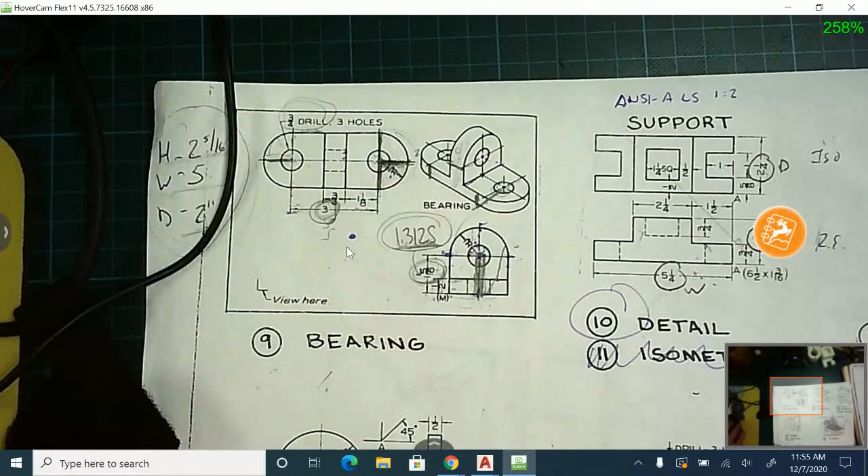Okay, we're going to look at the bearing drawing, which is number 9 in the packet.

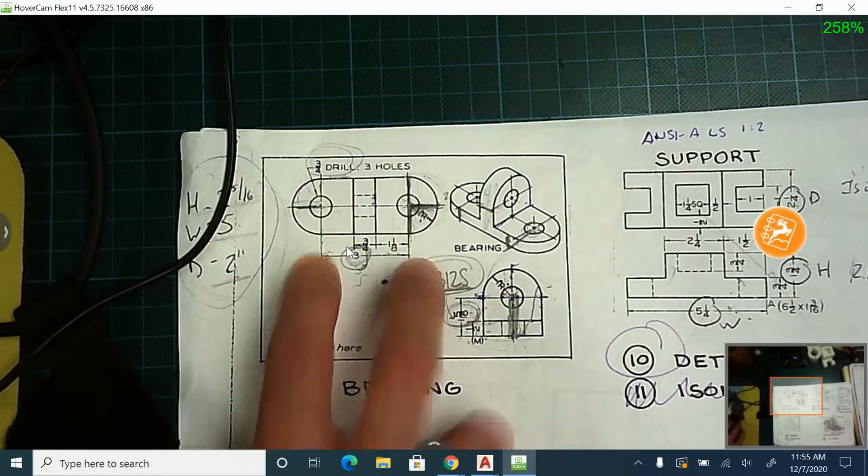First, you have to figure out your height, width, and depth. This one's a little trickier because it doesn't give you the overall height, width, or depth directly. You have to do some math to figure it out. For instance, our width only tells us that it's 3 inches here. We know the height is 1 5/16 from the bottom to the middle. Our front view is missing, so we have to do a little math to figure that out.

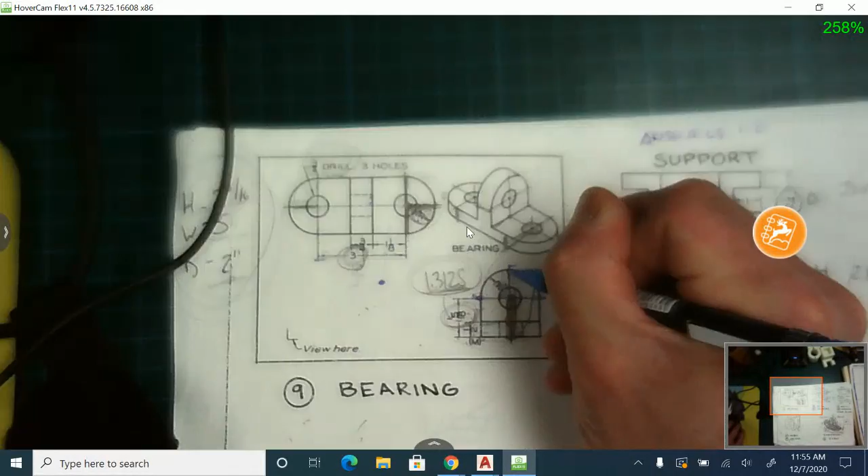What's very important is this radius dimension. This is 1 inch, and this radius dimension is also 1 inch. That means the distance from the center of this circle to the top is 1 inch. From the center here to the side is 1 inch. From the center here out this way is 1 inch. From the center here down is 1 inch, from the center here up is 1 inch, and from the center out is 1 inch. So again, that's a 1 inch radius.

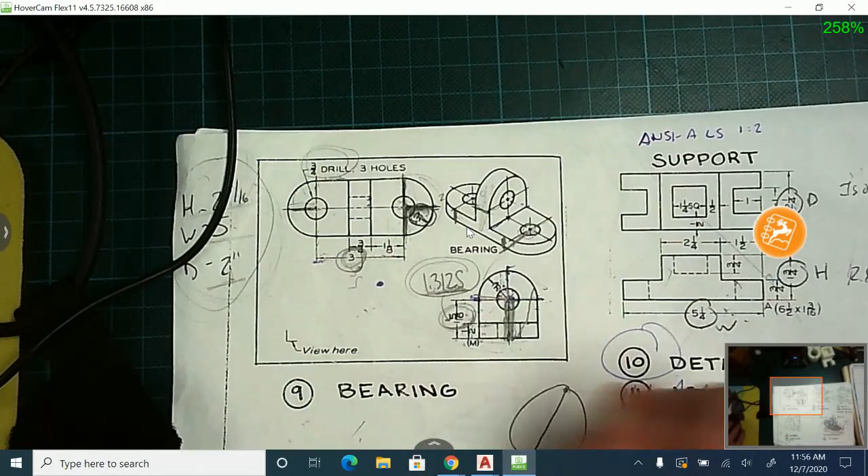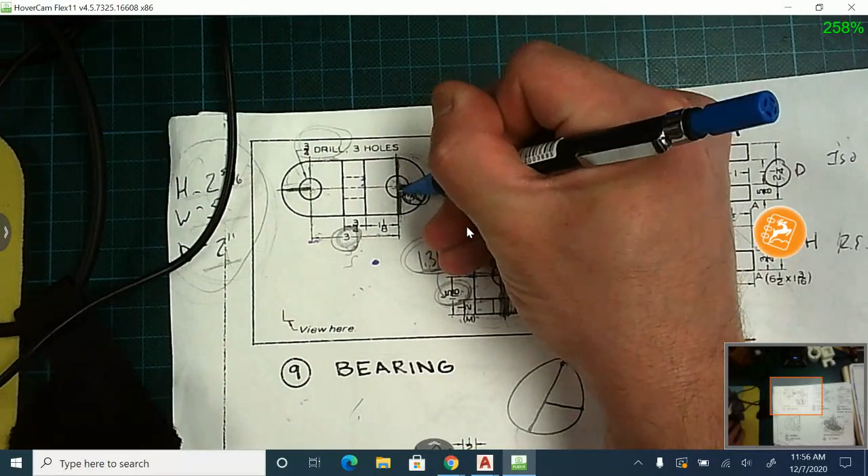Remember, a diameter is all the way across, and a radius is half. Knowing this is a 1 inch radius, and that it's 3 inches from here to here, I just add 1 inch on each side. So I have 1 inch there, 1 inch there, giving me 5. My height, I'm going to add 1 inch to 1 5/16. And my depth is going to be 1 inch up, then another 1 inch, so my depth is this distance, which is 2. So you have to figure out your height, width, and depth dimensions, do a little math, and add in the 1 inch radius.

Once you figure that out, the setup is really no different than our other 3-view drawings. Right now I started with my L shape. I'm going to use my offset tool, starting with the width, which is 5. I'm going to go 5 to the right, then offset and go up.

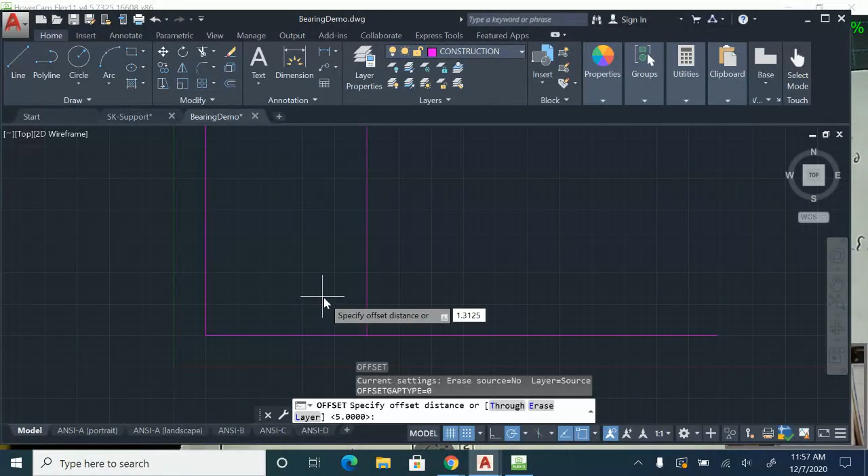1.3125, but actually I need to add the 1 inch radius. If you look at the measurement here, 1 5/16 is 1.3125, then you add the 1 inch radius, so it's going to be 2.3125.

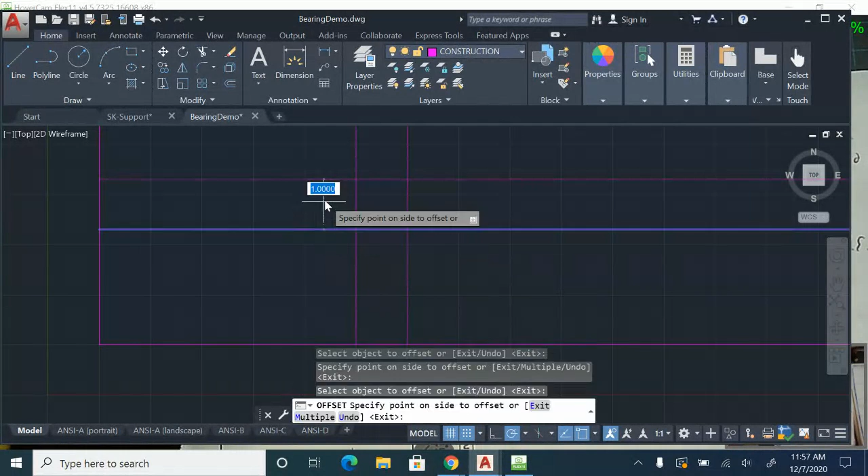Then I'll go up. I'm still going to set up my 1 inch spacing -- 1 inch to the right, 1 inch up. Where those 1 inch lines intersect at that upper right corner of the square, that's where I'm drawing my 45-degree projection line.

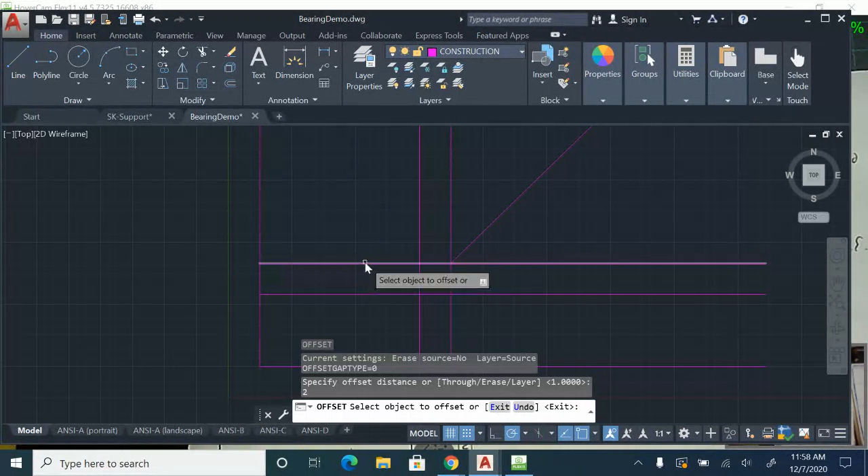And the last measurement I need is depth, which is front to back, and that's going to be 2. Offset 2. Now we have the 3 boxes set up for height, width, and depth.

Double check that they're correct. This should be good -- 5 inches. That should be 2 inches, or 2.3125 is correct. This one should be 2 inches from here to here. So I think we're good to go.

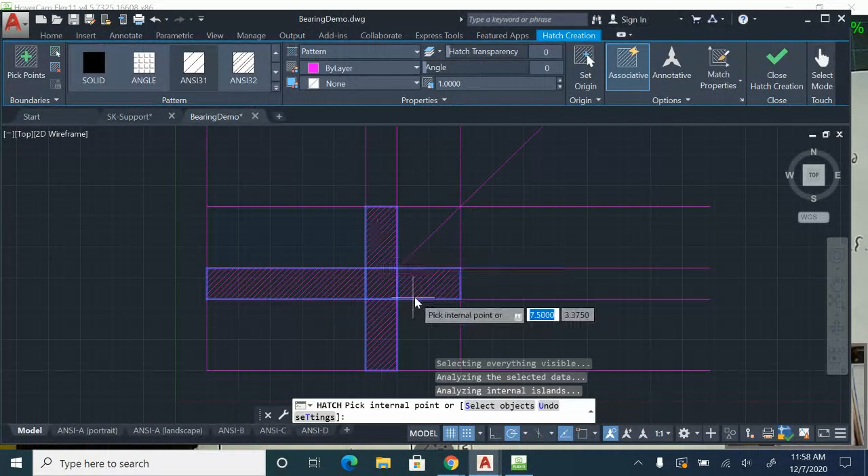I'm going to hatch in my 1 inch space just to help me visualize the spacing for a bit. So 5 by 2 5/16. This is going to be 2 by 2 5/16, and this is going to be 5 by 2. So again, height, width, and depth -- very important.

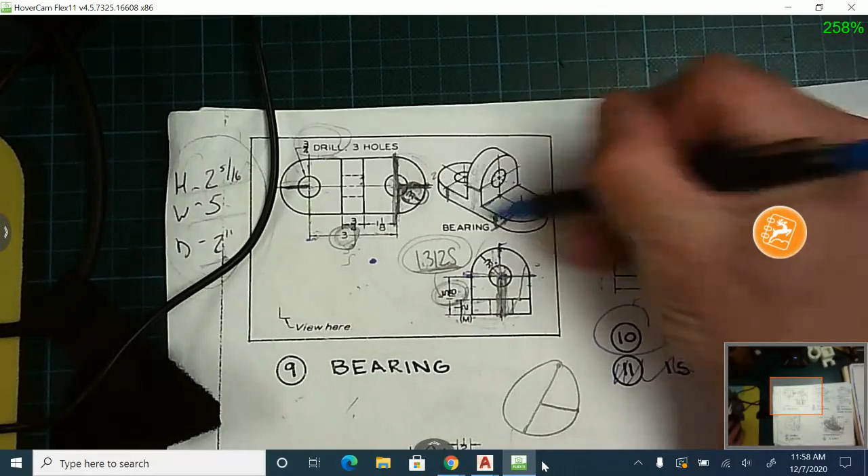Now I can start doing the insides. Maybe I'll start with this 1/2 inch base. You'll notice it's kind of like a T shape, an upside down T shape, and the thickness of this base is 1/2 inch. So what I'm going to do is offset up a 1/2 inch from the bottom.

Now I have the bottom part of it, so I can switch to visible layer really quick. I'm going to use my rectangle tool to draw a rectangle right there, and also I'll need a rectangle right here as well. So that's going to be my 1/2 inch base.

I also know that from the bottom here up is 1 5/16, so that's 1.3125. Now I have the center point of these circles, so I can draw in my 1 inch radius. Also the small circle in the middle has a diameter of 0.75.

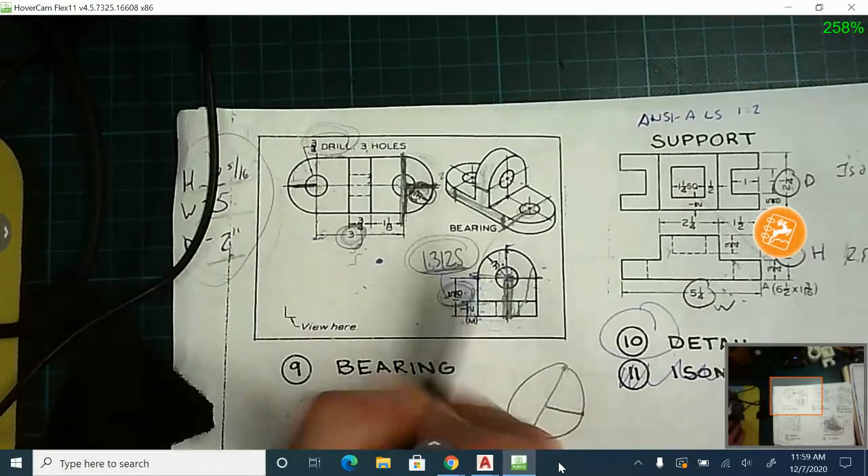And I found that out by looking right here -- it says 3/4 drill 3 holes, meaning these 3 holes are 3/4 of an inch, or 0.75 diameter, drilled. And I did the 1 inch radius. I'll have to trim off the bottom half of this circle though. So TR, enter -- I'm going to keep the 2 purple construction lines on each side. Hit enter, and I can get rid of the bottom half of that circle.

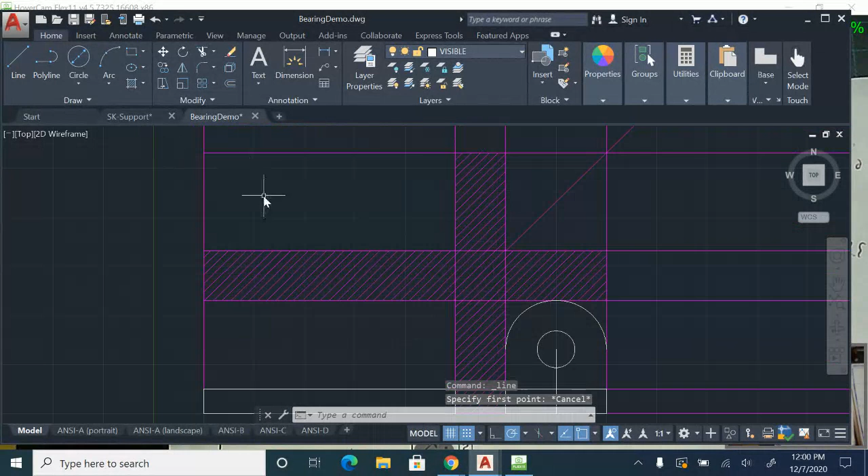Maybe for the top view, I can go up. There's a couple different ways I could do the top view -- I could draw a line, or I could draw the same rectangle. I'm not quite sure, I'll have to trim some of that. And then I can go this way, over 1 inch.

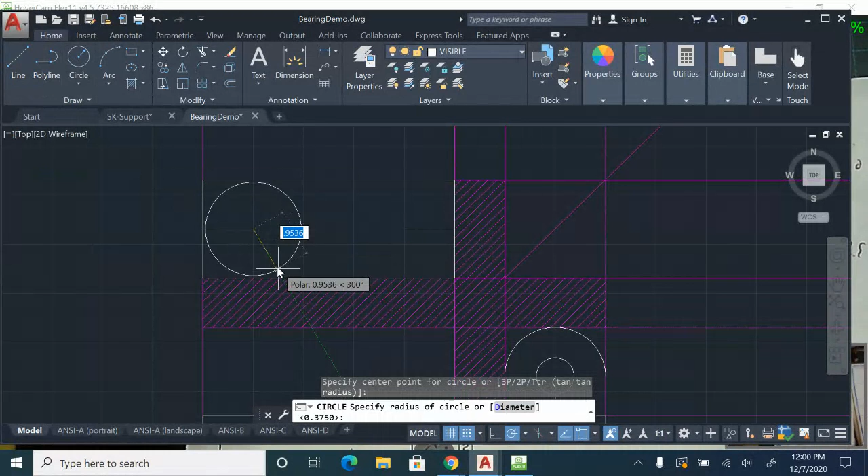Same thing on this side. I could go over 1 inch. That's going to get me the center point for the top view now. So I have my radius, 1 inch radius, and then I have my diameter of 0.75.

I can redo that on the other side, or I can use my copy tool. I can select both circles, click my copy tool or CO enter. My base point's going to be the center point here, and I'm going to copy it to the end of this line right here, which I drew over 1 inch from the side.

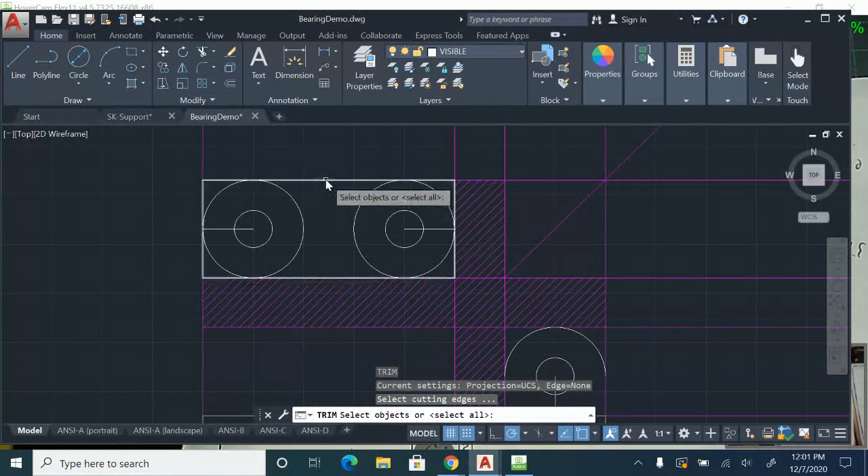And same thing, I can do a trim now, keep this, enter, get rid of these two sides. Now I'll also have to do another trim, and I'll have to keep the circles that I drew and get rid of these corners.

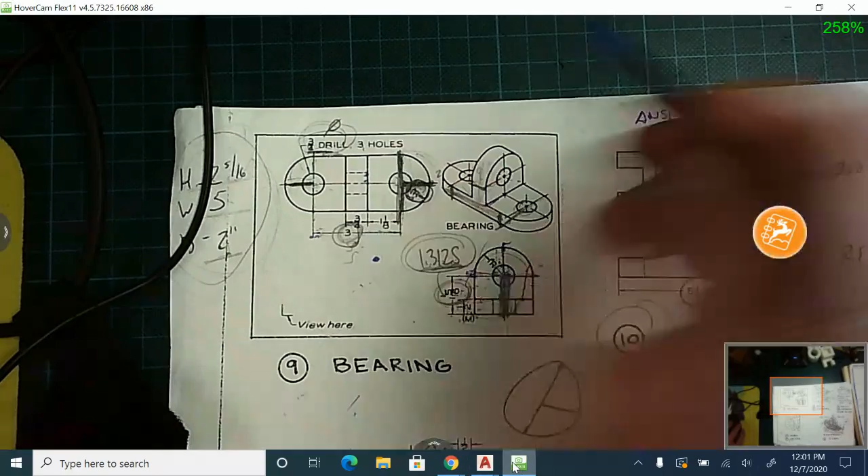Because remember, I used that rectangle tool to draw the big rectangle. Another thing I'll need to get in is in the middle here, there's a 3/4 inch space. That's the part that sticks up. So I have this 3/4 inch part that sticks up.

So what I could do with that is find my midpoint. I go right in the middle, so I know that's at the middle. If this is 3/4 thick, half of 3/4 is 3/8. So what I could do is offset 3/8. If I offset 3/8, I can click this line now and go to the right and go to the left. So now I have 3/4 of space.

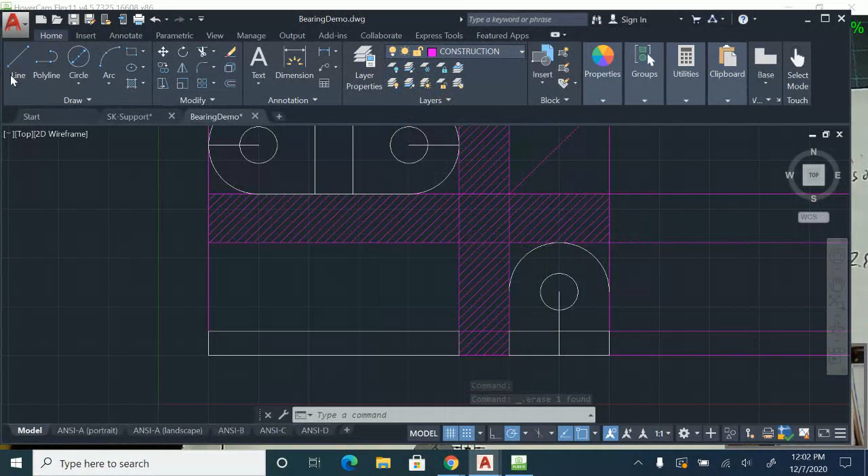Now to do the front view, watch this. I'm going to take a construction line. I'm actually going to bring that down because it's going to be like an upside down T shape. That's where that part will come in.

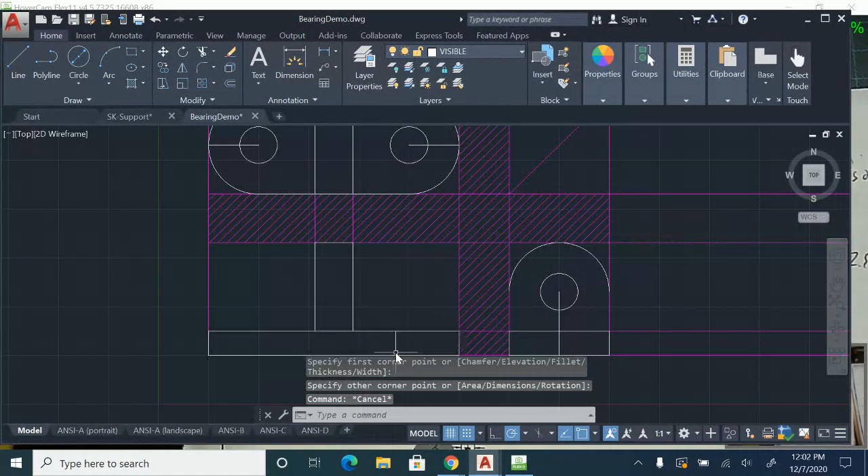And I can, again, use my visible line and just trace over this. Or a rectangle, or trace over the lines. I'll have to trim out this part here because it's all connected. It's all one surface. If you look at it closely, it's all one open T space there.

And then finally, I'll have to do some hidden lines. I can clean this up a little bit too. I'll have to delete these. For the hidden lines, I'm going to switch to hidden layer.

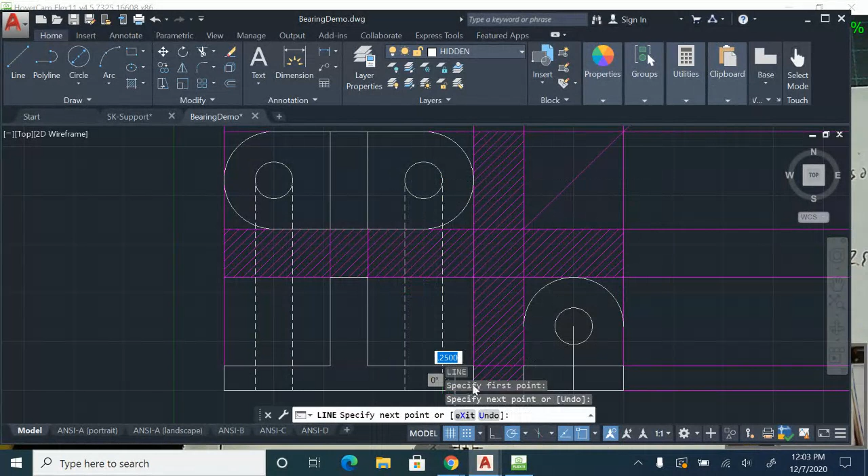I need to bring down the left edge of this hole and the right edge of the hole. Same thing here. I need to bring the left edge of the hole and the right edge of the hole. If I don't bring these hidden lines down, I would have no idea looking at this part that there's holes in there.

And when I trim it, I'm going to keep the top, enter, get rid of this, and then get rid of that. Same thing, I need to bring hidden lines over from this right side view, over, and from this right side view again over for the top and bottom of this hole. And I'll trim, keep this, and get rid of that.

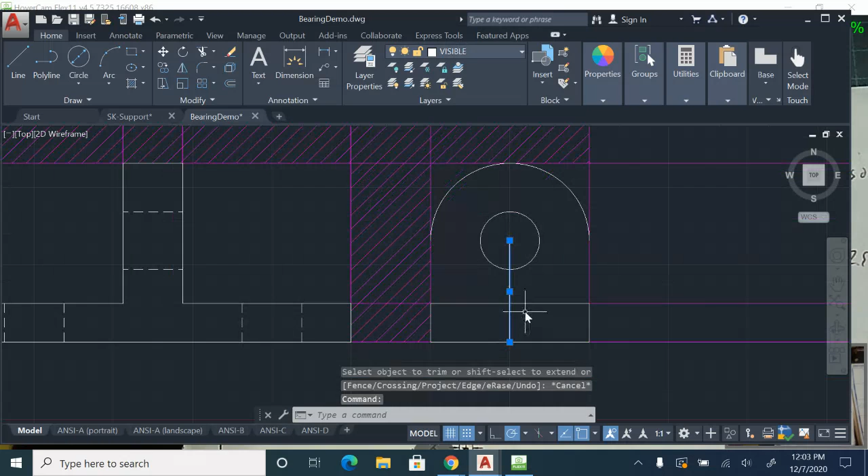The last thing would be I can get rid of this line. There's going to be hidden lines right here in this base, right? I have the two hidden lines on the bottom here. So I actually need to project this one over and down.

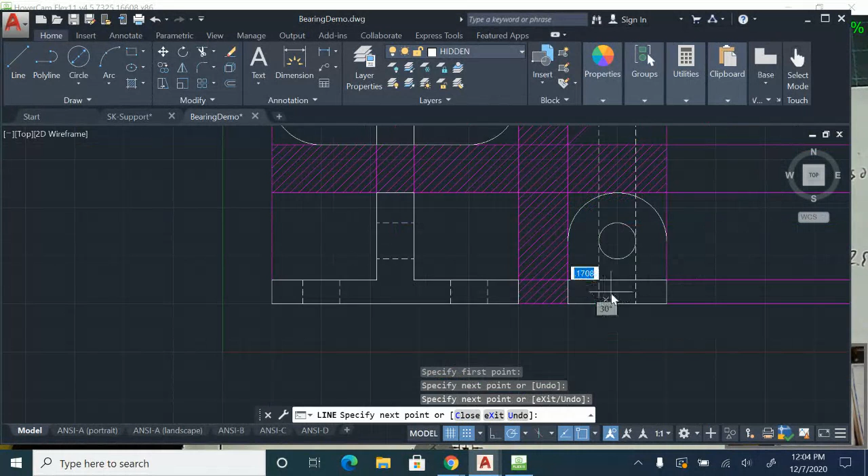Over to where it hits the 45, and then I go down. And those will be my hidden lines in the right side view. Get rid of this, and actually now I can just delete these two lines.

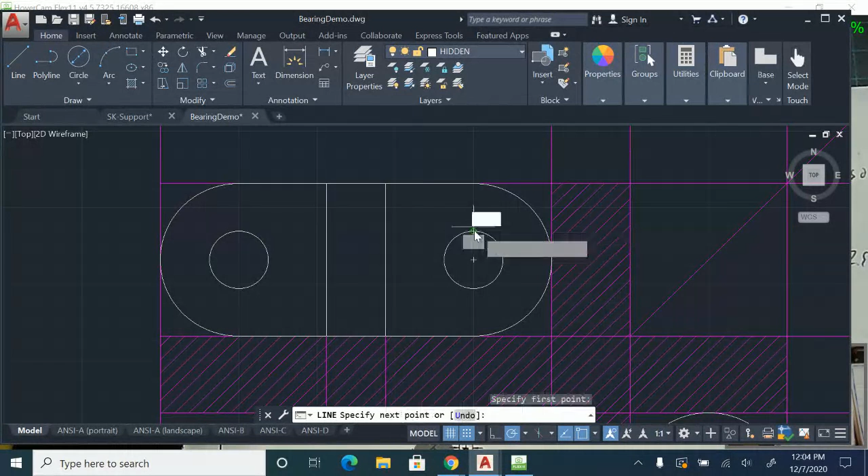And then finally, there'll be a hidden line in the upright. So the upright has a hidden line, that 1/2 inch hole. So I need to put hidden lines right in here. And I could actually just bring this circle over, the top of it, and the bottom of it. Even though that's technically not the right circle, it's this one that should go up and over. They're all a 1/2 inch, so it would work out that way. And I can get rid of this.

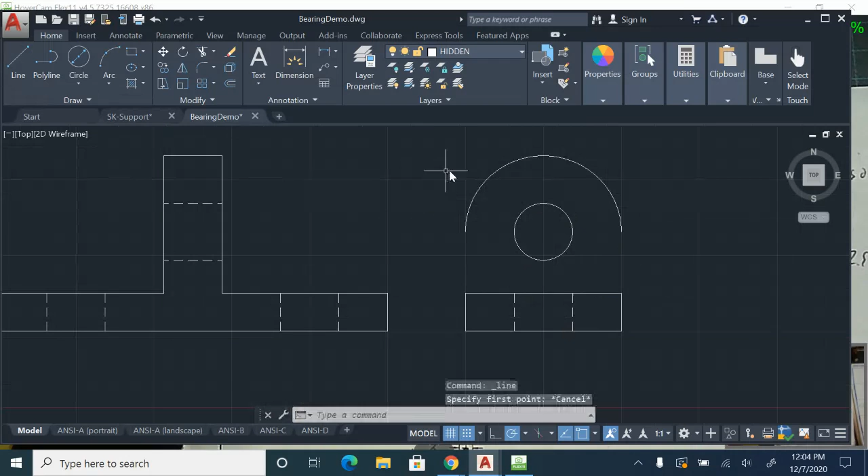If I turn off my construction lines, I can kind of see what I got. It looks like I need to just connect a line in the right side view, from here going down, and here going down. So that completes the part.

At this point, I would want to go into my center layer, annotate tab, and put my center marks on. 2 there, and then 1 there.

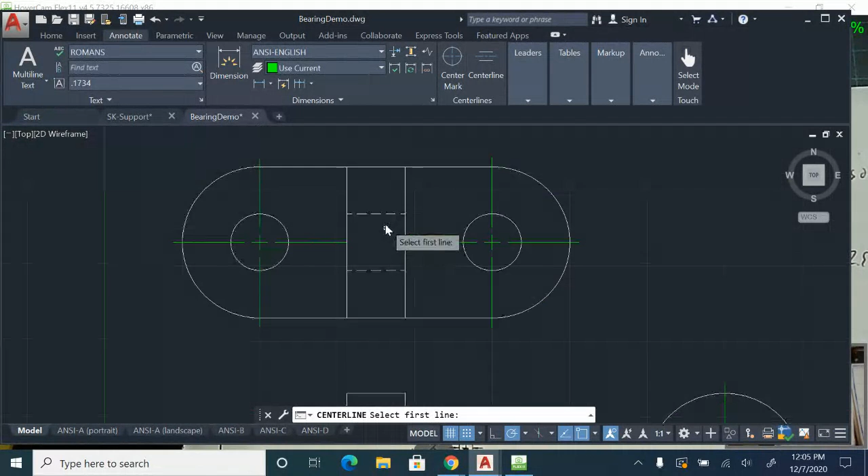And then I can also use the center line tool for the hidden lines. Now right here it's jumping around them, so I'm going to turn my snap off so I can click my 2 hidden lines. And then center line tool again. If you hit enter, it'll remember.

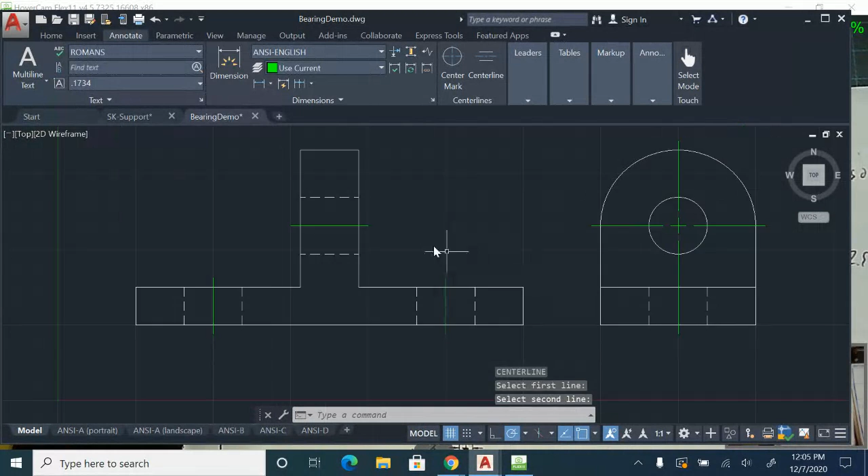And then finally here. The last thing you can do is if you click on the center line and just drag it out a little bit to the right and a little bit to the left, you'll get the center mark in the middle. These ones need to be dragged a little bit up and a little bit down. Same thing with this one, a little bit up and a little bit down.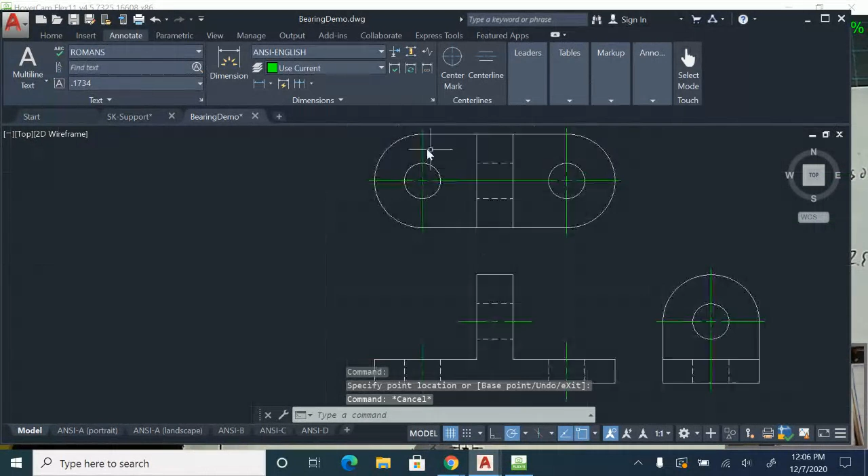Finally, I would be ready to go back to the home, switch to my dimension layer, and I can start putting my dimensions on there. In the next video, I will show you how to complete the isometric drawing for this.